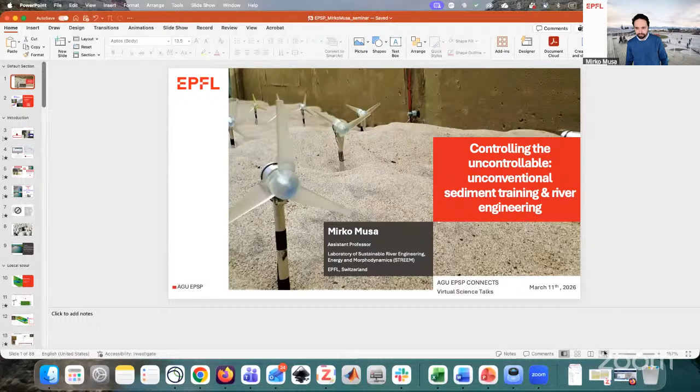Yeah, we do, perfect. Well first of all, hi everyone, good morning, good afternoon, good evening, depending on where you are. And first of all, thank you so much to EPSP members and the organizers for inviting me to give this talk, I'm really happy to be here. As I said, my name is Mirko Musa. I'm a fairly new assistant professor at EPFL, I started about a year ago.

Here I lead the Stream Lab. As you can see, it's misspelled on purpose, because it stands for Sustainable River Engineering, Energy, and Morphodynamics. I acknowledge it's a mouthful title, but it really encapsulates well what we do in my group. We work with renewable energy from water, specifically hydropower and hydrokinetic energy, but we try to do it in a way that works synergistically with river engineering, river morphodynamics, and river management. This is essentially the leitmotif of my talk today.

The theme of today's talk is to show you some unconventional ways to do sediment transport, sediment training, and to manage sediment training. Why?

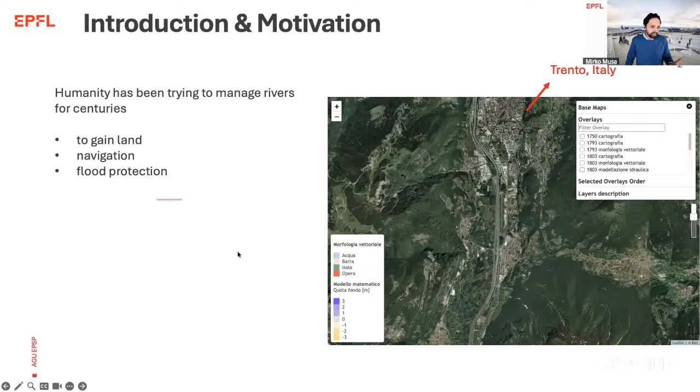Well, humanity has been trying to manage rivers for centuries, as you all know. We mostly did it for human development, for our own gain, to gain land, to allow for navigation, but also to protect ourselves from flooding and so on. And how did we do that? Well, we simply tried to fix rivers in place. We stabilize riverbanks, straighten the course of rivers, resulting basically in the suppression of their natural dynamism.

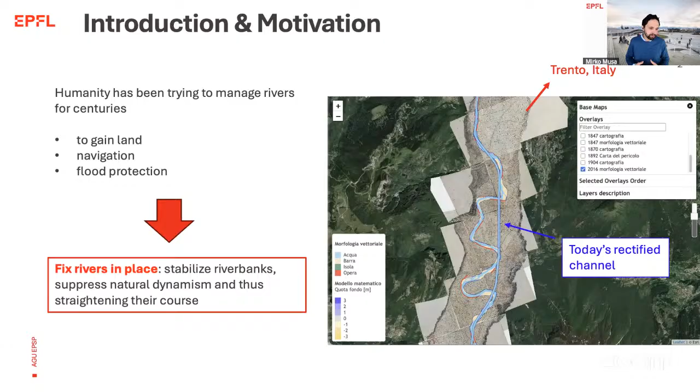We also now know that, unfortunately, by doing that we were actually harming the river system. There was this fantastic paper by Professor Jim Best in 2019 in Nature Geoscience, where he reviewed several of the anthropogenic stresses that are currently changing and, in some cases, degrading rivers faster than nature can adapt to.

And of course, in addition to human management, now we also have climate change that is obviously complicating things, exacerbating the problem. It's also reminding us that our assumption of stationarity in our hydrological statistics from the past is no longer valid. But it's also reminding us that we need to come up with management strategies that are not only sustainable, but also flexible and adaptable.

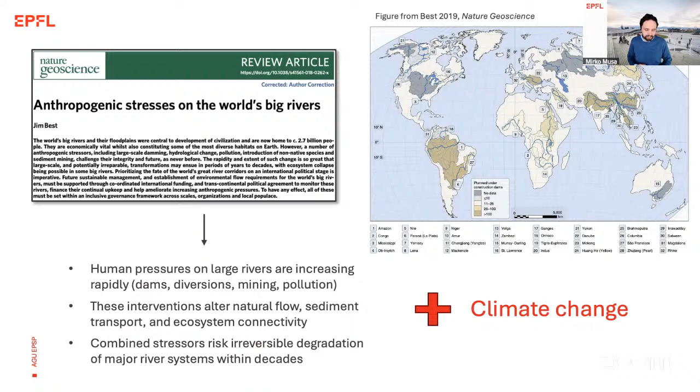So one way we started addressing these problems is, of course, stream restoration. We've been increasingly adopting measures to renaturalize rivers, sometimes with mixed success, obviously. Sometimes we tried, for example, to impose an engineered, quote unquote, natural-looking shape of the river, like a meandering shape.

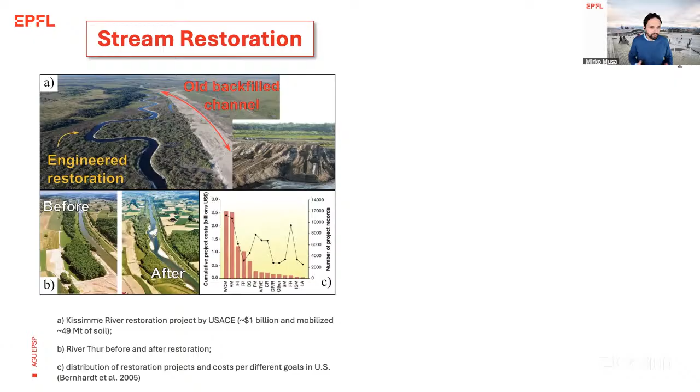Moving tons of soil with very costly interventions, and again with mixed success, or simply sometimes we just started to remove the lateral constraints of the river and let the river rewander again. Of course, this is a great solution, but it's not always applicable, because at the same time we still have a lot of population centers, development, and infrastructure within and along the shores of big rivers.

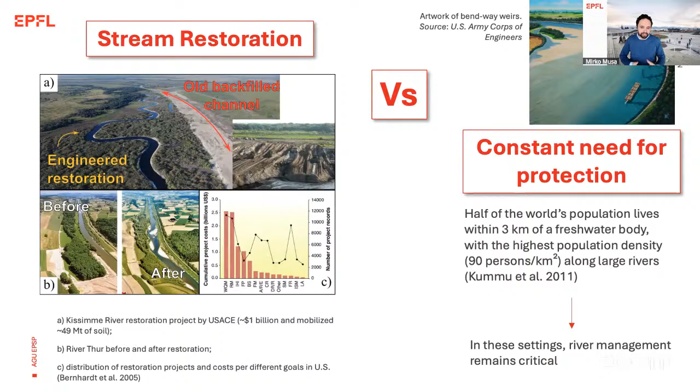So in these settings, river management still remains a critical necessity. And to me, there is a need to do both restoration and protection at the same time. We need to try to address them both in a sustainable way.

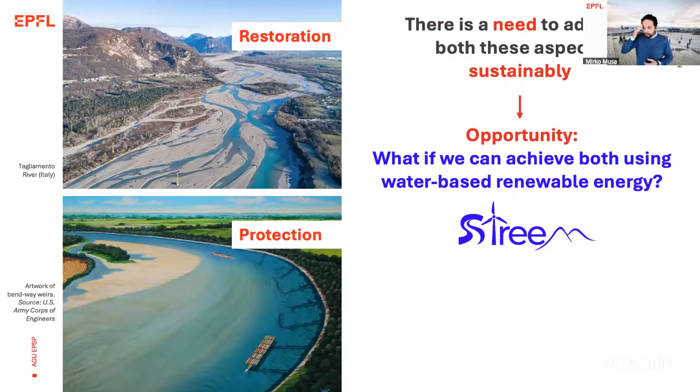Reflecting on my past research, I wondered, what if we can achieve both of these aspects using renewable energy technology? I know it sounds crazy, but the reason I'm saying this is because in my past research—I did my PhD at the University of Minnesota at St. Anthony Falls Lab, known as SAFL, and then I got a position at Oak Ridge National Lab.

In my previous work, I observed that if we place hydrokinetic turbines in rivers, they actively interact with sediment dynamics, both locally and non-locally. So today I'll meander, pun intended, through past and more recent research to show you these unconventional ways to interact with and manage sediments, and perhaps convince you that we may be able to synergistically integrate river-based renewable technology and sediment management strategies.

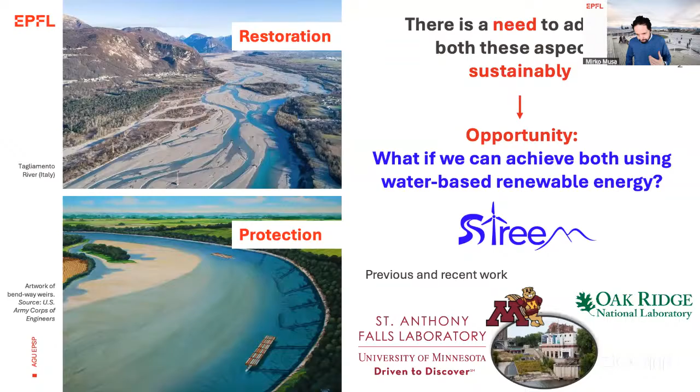Now, I put this image here for the early career students out there. This is how I felt during my PhD, since I was doing this mixed research—how I felt sometimes when talking about turbines to a morphological audience, and at the same time talking about meandering and morphodynamics to turbine people. So it's always been a struggle to fit in both shoes.

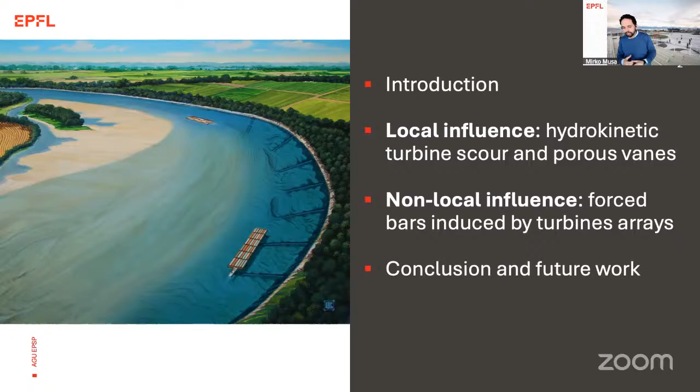But anyway, today I'll show you some examples of first how turbines and also porous vanes can steer sediments, and then how multiple turbines can actually influence the morphodynamics non-locally, at larger scales. But let's start with the local influence.

This whole thing started because at the very beginning of my PhD, my project focused on looking at the interaction and impacts of hydrokinetic turbines on the physical environment of rivers. Hydrokinetic turbines are essentially the same as wind turbines, but in water. The geometry is exactly the same, the working mechanism is the same: flow, in this case water, flows through a rotor that spins and creates energy.

The power you can extract is proportional to the size of your device, but most importantly to the velocity of the flow, because it's to the cube. So the first thing we did was look at the scour that an operating turbine could induce on the seafloor or river floor, the erodible bathymetry.

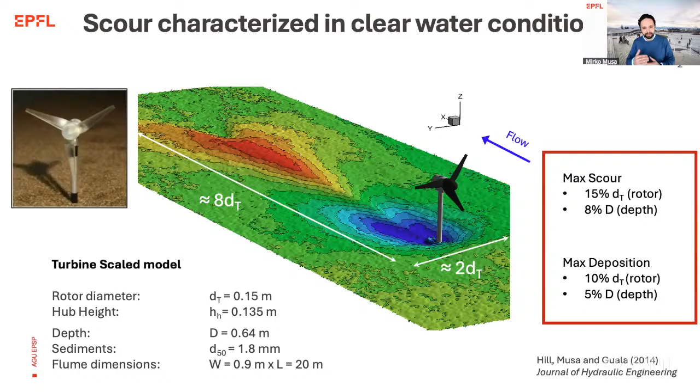This is, for example, a movie of the evolution of a scour downstream of a large-scale turbine model. We characterized both the spatial extent and magnitude of the local scour and deposition induced by an operating turbine using a small model on an erodible bathymetry, in clear water without sediment transport, but at the threshold of motion. Then we extended that study to a live bed, with sediment transport and moving bed forms through the channel.

This time we were monitoring the evolution of the bed by scanning the topography with sonar back and forth across the channel at the turbine location. You can see the resulting movie of the dunes traveling through the turbines.

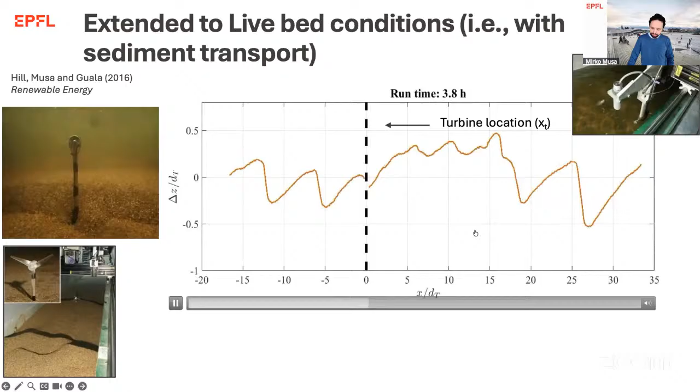But also, as opposed to a static bridge pier scour, a hydrokinetic turbine can actually yaw. Yaw angle is the misalignment between the axis of a turbine and the direction of the flow. We wanted to test this because we had a hypothesis, a feeling that by yawing the direction of the rotor, you would have an impact on the direction of the scour and deposition pattern, and potentially you could affect the mobility of sediments locally.

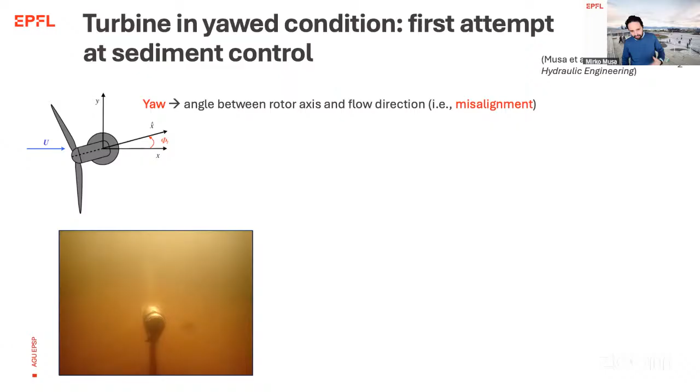So we designed a bunch of experiments to test the effect of yaw angles. Since we thought the turbine could impact the directionality of sediment, we also wanted to evaluate whether we could use this strategy at the sidewall, placing the turbine close to the side bank of the channel as a form of erosion mitigation technique, because the turbine is extracting energy from the flow, slowing down the velocity, potentially slowing down side bank erosion, while at the same time redirecting sediment toward the bank itself.

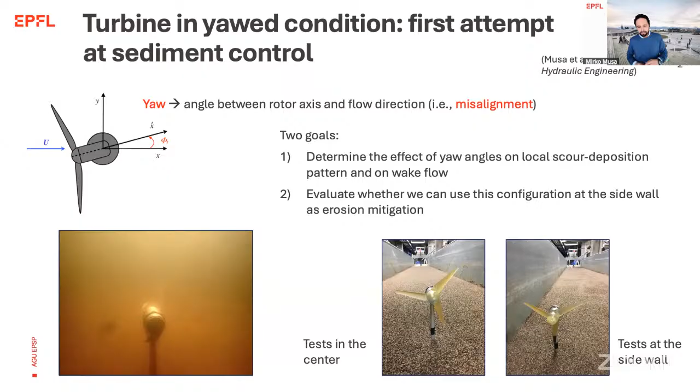So we ran several tests, first with the turbine in the middle of the channel at different yaw angles, again on the same erodible bathymetry, and again in clear water conditions, so with no sediment transport, but at the threshold of motion.

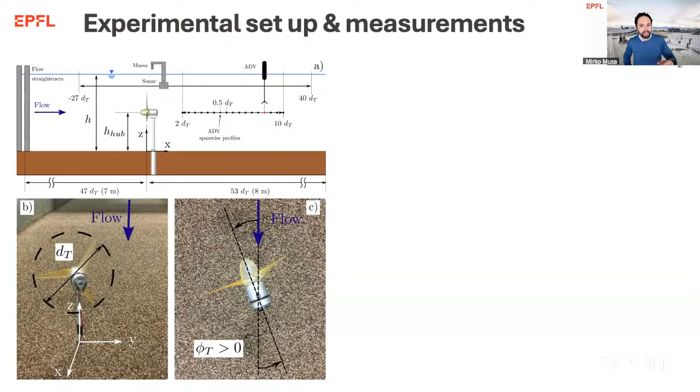We first characterized the baseline, basically redoing the same experiment as before with a turbine unyawed in the middle, characterized the local scour and deposition, and then tracked the time evolution of the scour, checking until it reached equilibrium, which happened about 2 hours into the experiment. At that point, when the final topography was in equilibrium, we started measuring the flow behind the turbine.

We used an acoustic Doppler velocimeter, moving it across the channel in the span-wise direction at different X locations downstream, in order to characterize the wake of the turbine. The wake is essentially the region behind the turbine where the flow slows down because the turbine is extracting energy from the flow, and so you have a region called the wake deficit.

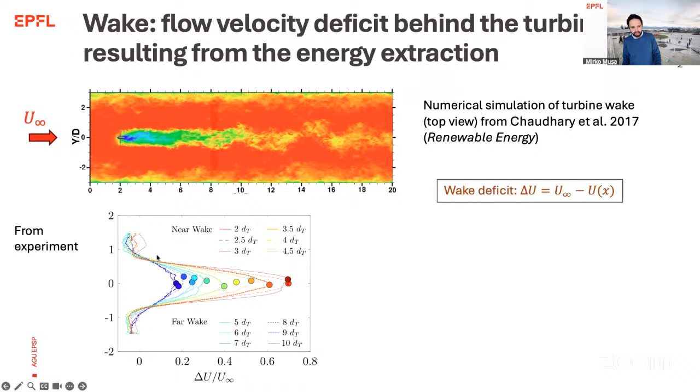The wake deficit is the difference between the incoming undisturbed flow upstream of the turbine and the flow measured behind it. As you can see from our measurements, these lines are span-wise profiles of the wake deficit. The closer you are to the turbine, shown by the warm colors, the bigger this wake deficit is. I acknowledge the choice of colors is pretty poor because it's essentially the opposite of the numerical simulation—the warm colors here represent maximum wake deficit, lower velocities, which correspond to the blue colors in the numerical simulation.

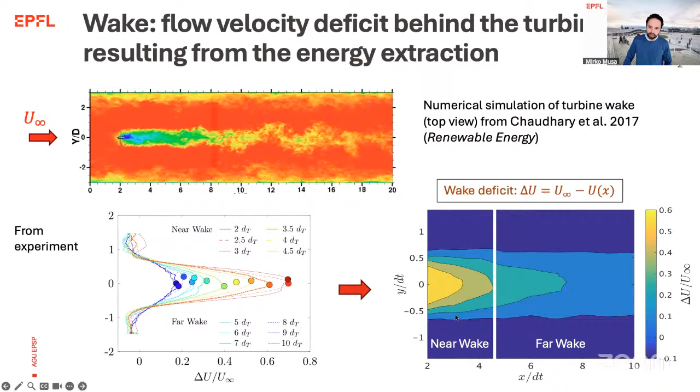As you move further downstream from the turbine, the wake deficit starts decreasing because now high momentum fluid from the side starts entraining the wake, recovering toward the undisturbed condition. If we stitch together all these profiles taken downstream of the turbine, we obtain a nice contour plot of the wake, which becomes important later.

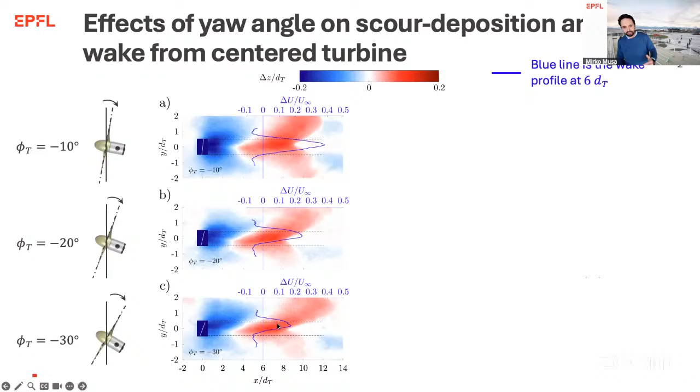To visualize the effects of yaw angle on both the local scour and deposition pattern and the flow behind the wake, we plotted the profile at 6 rotor diameters downstream of the turbine, superimposed on the final bathymetry, and then started yawing the turbine more and more. The more negative the yaw—in other words, the more the rotor tilts upward in the plot—the more both the wake and the pattern of maximum scouring and deposition start moving in that same direction, being steered toward where the yaw is happening.

The same thing is true but in opposite if we look at the other yaw, positive yaw angles. You see that the rotor is tilting down, and so also the wake and the resulting pattern starts tilting and getting steered in the same direction.

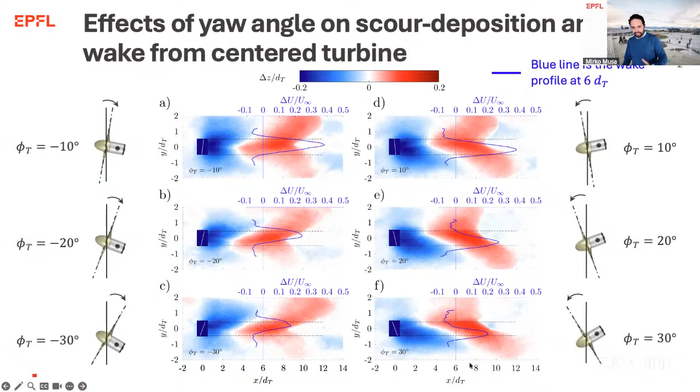So the next step was to look at whether these findings could hold when the turbine is close to the sidewall, because we wanted to see whether the turbine could act as a stream bank protection, and could either mitigate or in opposite enhance the side bank erosion.

The idea was to potentially use the turbine as a protector of the bank, because by extracting energy from the flow, you would shield the bank with the wake, but at the same time steer the wake away from the bank. You didn't want the wake to impinge on the side bank, because the wake itself is turbulent.

And at the same time, try to move the sediment deposition towards the bank to act as a bank toe protector or a bank toe reinforcement.

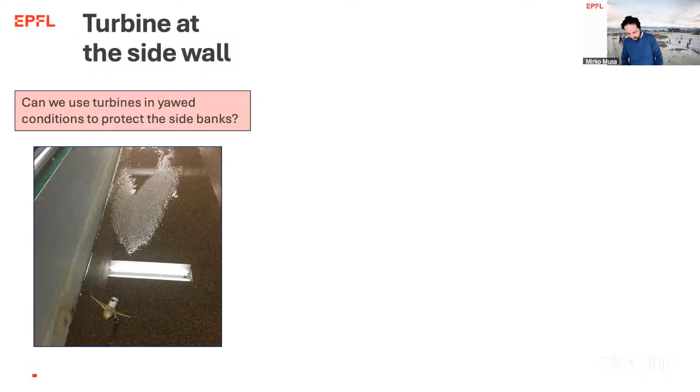To do that, we tested 3 cases: the turbine at the wall with the un-yaw condition, the negative 20 yaw, and positive 20 yaw. You start seeing from both, if you look at the wake and how the scour deposition pattern behave and react, that maybe the positive 20-degree was actually doing what we're trying to do.

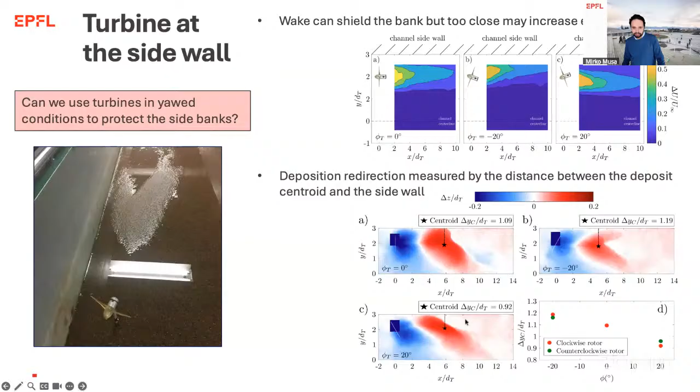You see that the wake is steered toward the center of the channel, as opposed to the negative 20 where it's actually pushing against the channel. At the same time it's moving the centroid of the positive volume towards the wall—the centroid is getting closer, as opposed to the negative 20.

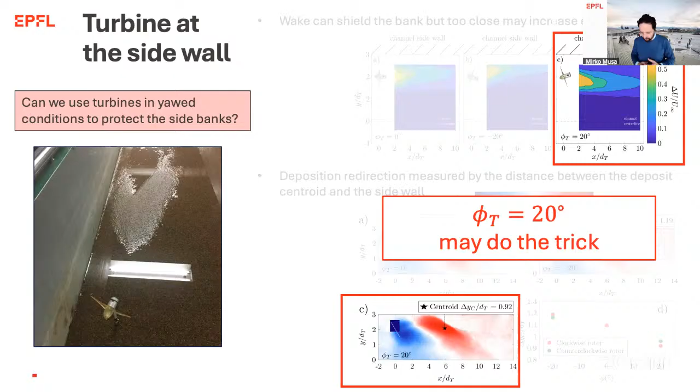So we thought that maybe the 20-degree yaw was actually doing exactly what we're trying to do and might do the trick. Based on this result is where I got my first idea of what I'm working on now, because we saw this positive feedback—by yawing the turbine we could potentially reach that goal of protecting the bank.

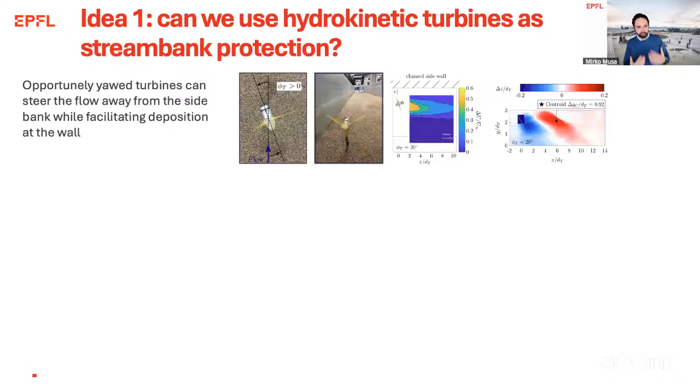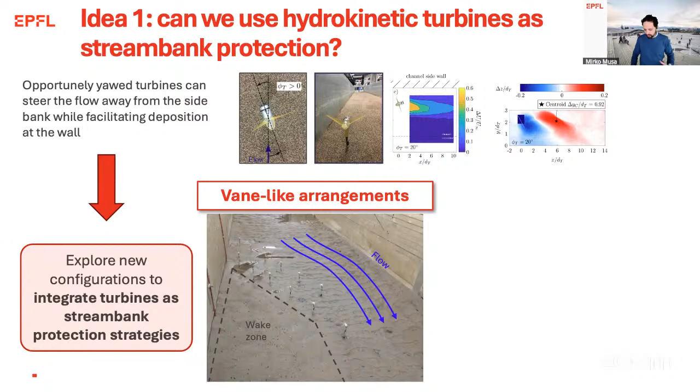So what if we try to use more turbines as a stream bank protection strategy? For example, rearranging them to look like a vane, pushing the main flow away from the bank and protecting the bank using their collective wake. Or in an extreme case, potentially putting turbines on the outside of a river meander.

On the outside of a meander, that's where the flow is accelerated, so potentially that's where the hydrokinetic potential would be maximum. But it's also where erosion is maximized, because of the fast flow and the secondary circulation that erodes sediments—actually what causes the meander to move. So what if we put turbines in there and start extracting energy, and maybe counteract this erosion process?

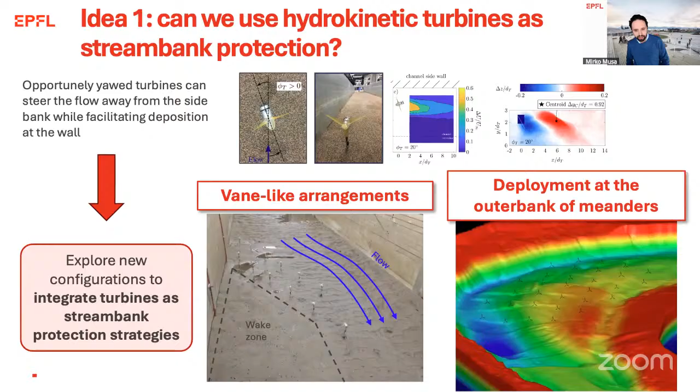So this is one of the things I'm thinking about and working on. But of course there are other more classic ways to train sediment, to affect sediment motion. One of which is the submerged vane. This is not a new technology or design—it was introduced in the 80s by Professor Jacob Odgaard in Iowa. These vanes are also known as the Iowa vanes.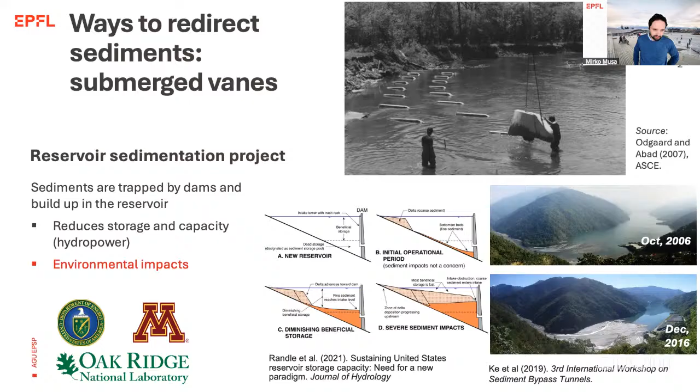But we recently tested a similar concept, because we were trying to move sediments as part of a larger project on reservoir sedimentation. This was when I was at Oak Ridge, a collaboration between Oak Ridge, the University of Minnesota, and the Department of Energy, trying to find solutions and mitigations for the issue of reservoir sedimentation.

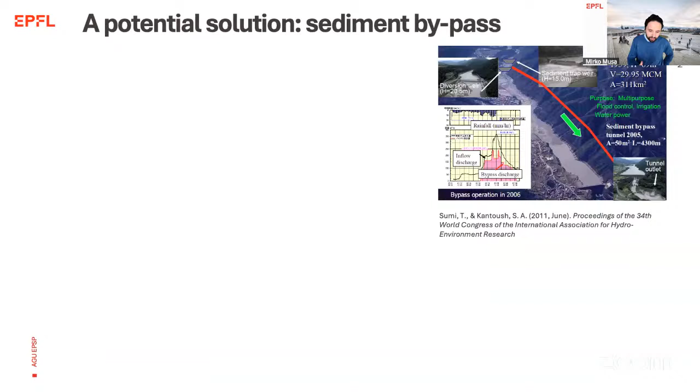Specifically, one solution is bypassing sediment around the dam, from upstream to downstream. Typically it's done with channels in the few examples in the world, or as the University of Minnesota was proposing, using hydrosuction—a technique where you suck the sediment from upstream the dam and then siphon it around the dam. As part of this project, to maximize the extraction, we wanted to redirect as much sediment as possible towards this suction point.

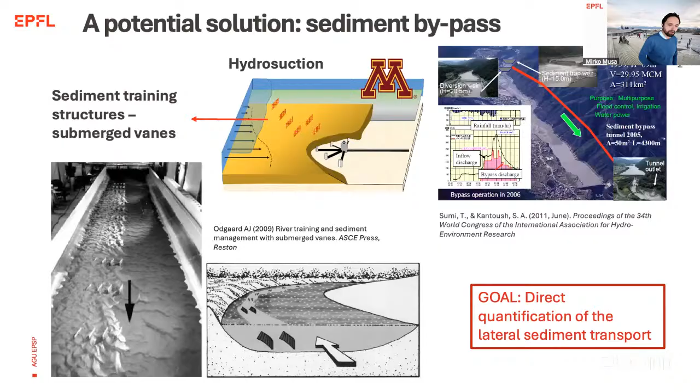And so we start testing submerged vanes for that reason. But as we were designing the experiments, we realized that we really didn't have a good way to measure this lateral movement of the sediment, so we didn't have a good way to quantify the efficacy of these vanes. Through our experiment, we came up with a new methodology to try to estimate the lateral sediment flux, starting from high-resolution scans of bed forms.

So you see here, we basically tested an array of porous vanes in the main channel at SAFL, at St. Anthony Falls, in live bed conditions, with bed forms traveling along the channel. Here we were scanning 3 regions in the channel using this submerged laser scanning device that was developed at SAFL.

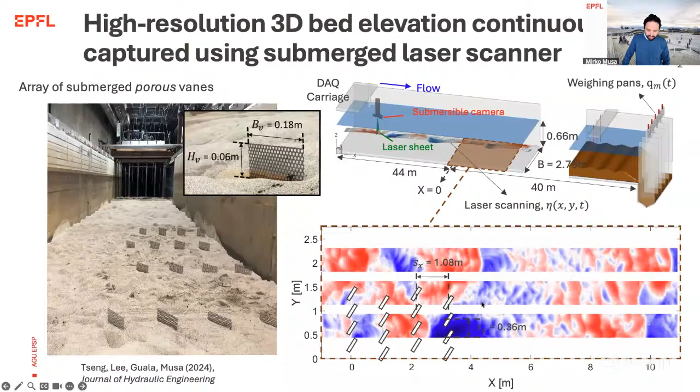And with that, we were able to identify each individual bed form on a streamwise transect at consecutive times. Using an algorithm developed by Jiong Lee, one of our collaborators, we extracted the geometric characteristics of each individual bed form and their migration velocity.

And then using the Simons et al. equation from 1965, we could estimate the streamwise sediment transport flux, calculated basically by relating the geometry of single bed forms to their velocity. So in this way, we had sort of a Lagrangian view, if you will, of sediment transport, each dune contributing a little bit to sediment flux.

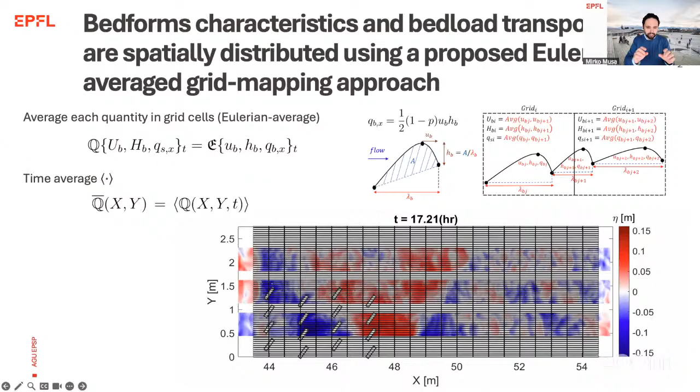But then we switched this Lagrangian view to a more Eulerian observation approach, by conditionally averaging all the bed form geometric characteristics, and the associated bed load transport, on a regular grid for the entire domain. By averaging all these quantities in time, we could obtain an average bed load transport rate that was spatially distributed over a 2D XY plane.

And this is what it would look like. These are values of streamwise bed load transport in the 3 scanned regions. Of course, for a baseline case, it's fairly homogeneous, as it should be. Whereas for the vane array experiment, you see a big reduction of sediment transport capacity within the array. It's easy to understand why, because the vanes are slowing down the flow, slowing down the bed form movement, reducing the capacity to transport sediments.

This is more evident if you take, for example, a transect within the array at x equal 3 meters, which is this panel here, the second panel in the lower plots. You can see that this is the span-wise profile of the bed load flux.

Where the red line is from the vane array, you see that there's definitely a reduction in sediment transport within the array, in the Y values within the array, as compared to the baseline case, which is the black dashed line.

But you can find an increase in sediment transport on the unobstructed side, next to the array. That's because by continuity, the flow there is instead accelerating, so the bed forms probably are going faster, giving a much larger sediment transport capacity.

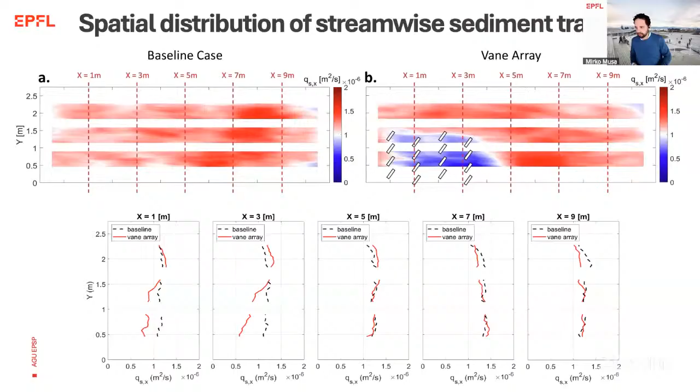But then downstream of the array, you see that the sediment transport capacity goes back to being homogeneous like the baseline, meaning this effect is only localized in the vicinity of the array. This imbalance in sediment flux that we notice close to the array is exactly what we think will explain the existence of a lateral flux on average.

And this is even more justified if you look at the instantaneous movement of sediments. If you stare at this video long enough, you'll start seeing that behind each vane, at some point, there's the formation of a chevron shape tilted towards the left-hand side of the channel, or in this plot, towards the upper side.

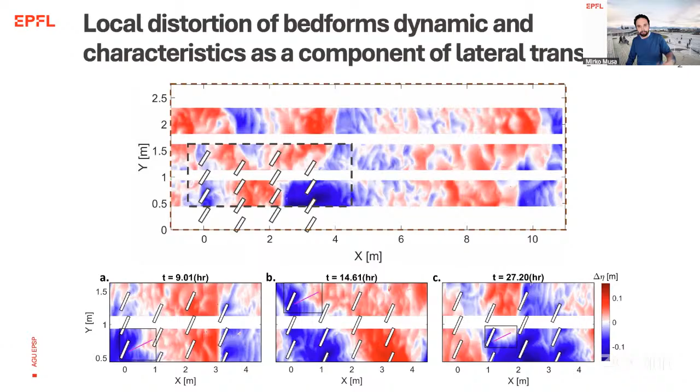You see some snapshots here in the bottom. If you look, you'll notice that the bedforms are physically distorted and steered towards the upper hand side. This is one of the components of this lateral transport that I'm talking about.

Thanks to this Eulerian average mapping, we were now able to estimate this lateral bed load transport by simply applying mass conservation, because we're observing this imbalance in the streamwise flux.

So this QSY is the lateral flux through the interface between the two control volumes. If you take the difference between the two mass conservation equations in the two control volumes, you can get QSY, small qs, which is the lateral flux per unit length. Then, if you multiply this lateral flux by the length of this interface, L, you get the total amount of sediments moved laterally—an estimation of the total sediment flux in the lateral direction.

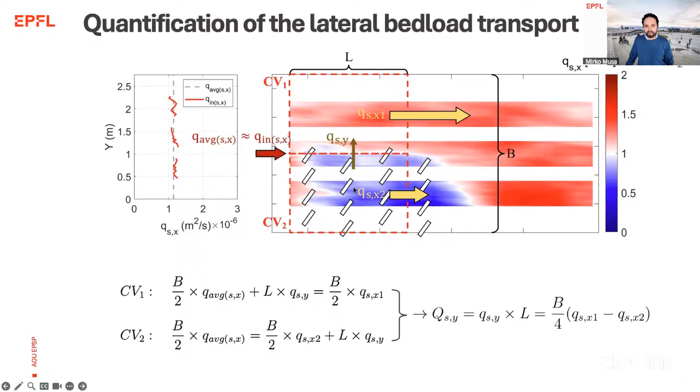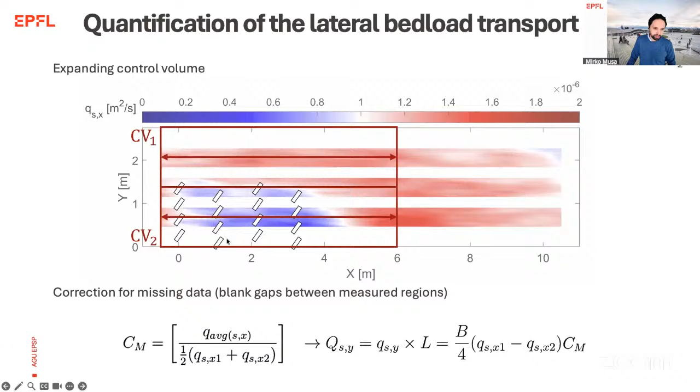By expanding this control volume—literally moving the downstream boundary and extending the length of this interface—we could show the longitudinal evolution of the lateral flux as you move downstream. Because we have gaps between the measured regions, we had to introduce a corrective coefficient in order to ensure global mass balance.

But essentially, these are our results. You see the black and gray bars are this lateral flux that we quantified. The black bars are from the vane array, whereas the gray bars are from the baseline. For the baseline, there's almost no lateral flux, as it should be, whereas for the vane array, you have a pretty significant lateral flux, at least compared to the baseline.

Again, this top plot is the little qs, the QSY, which is the lateral flux per unit length. But then if you multiply that by the length of the interface between the two control volumes, you can estimate the total mass that you're moving.

You see that this total mass peaks around 2.5 meters, around the third row of the array, meaning that if we were to place a hydrosuction point, here would be the best place to collect most of the sediment—which was ultimately the goal of our project. We believe this was the first attempt to quantify lateral sediment transport in this way.

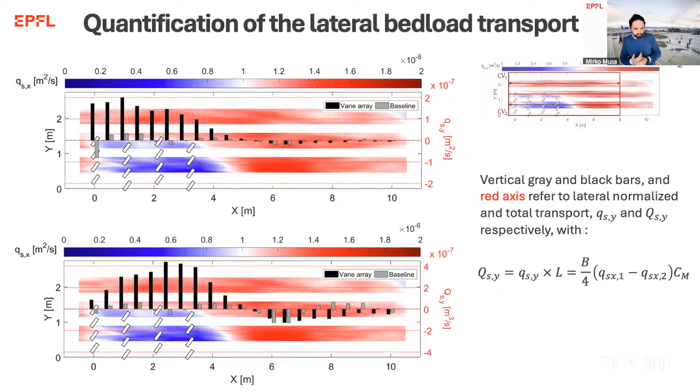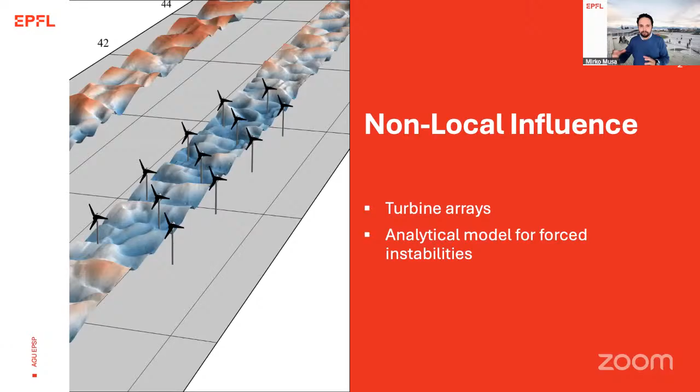So now switching gears—so far I showed you that we use turbines and porous vanes to steer sediments towards a preferred direction and influence the local morphology. But now I want to show you how actually a pack, an array of turbines, would affect the morphodynamics non-locally, so further away from the region of influence.

If you remember, earlier I showed you that one single turbine in live bed would create a local scour, but I said that probably there wasn't much of an effect non-locally. However, that case was a very simplified, very specific case with one single turbine centrally installed in the cross section.

But in real life, we might actually want to install turbines on one side of a river, of a channel, either to use it as stream bank protection, or more pragmatically, to allow for navigability on the other side, or to lower installation and maintenance costs, and so on.

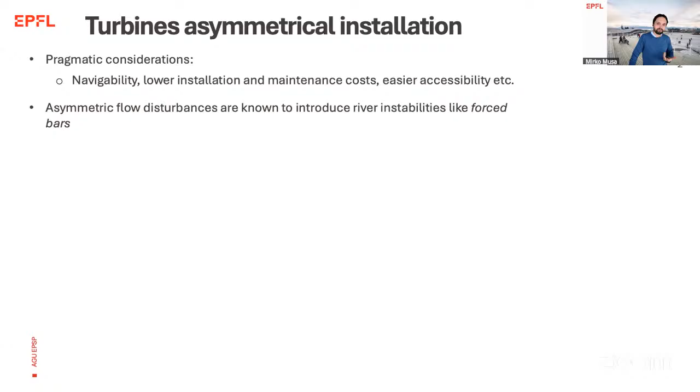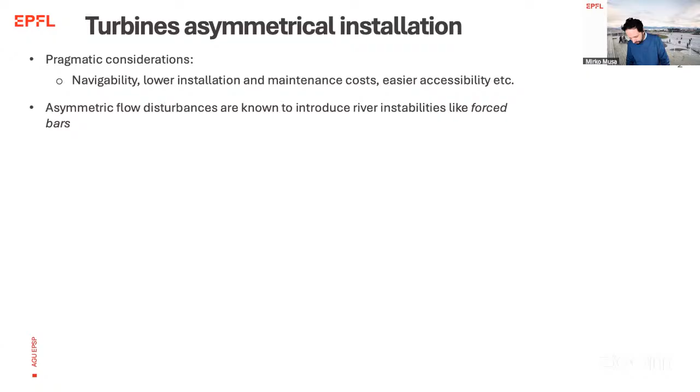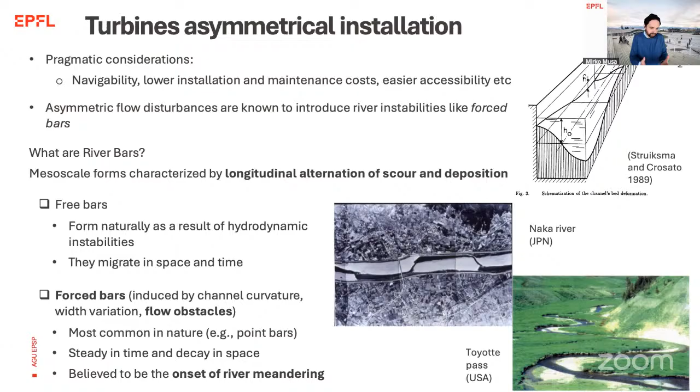They can be forced by external stressors, like in this case the turbines. To me, this is the more interesting one because, first of all, they are the most common and most observed in nature, and they are steady in time and decay in space. Because they are steady, they are believed to be the trigger of river meandering, since they impose a specific motion of the flow. So in the perspective of evaluating the impacts of turbines in rivers, this was a big deal, something we needed to look into.

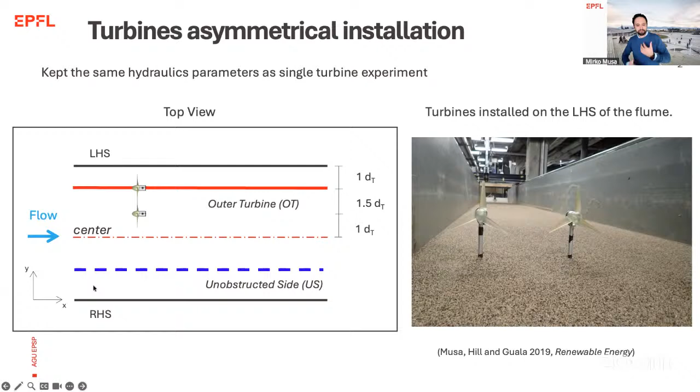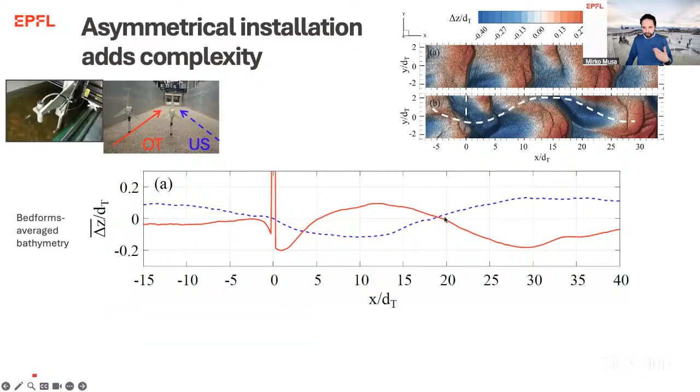We ran the experiments for a long time and averaged all the sonar signal in time to evaluate the average bathymetry. The mean bed from the two sidelines presents an intriguing and complex profile, characterized by a steady alternating scour and deposition pattern that totally resembles the longitudinal profile of a forced bar, with an amplitude up to 18% of the water depth, which is pretty significant.

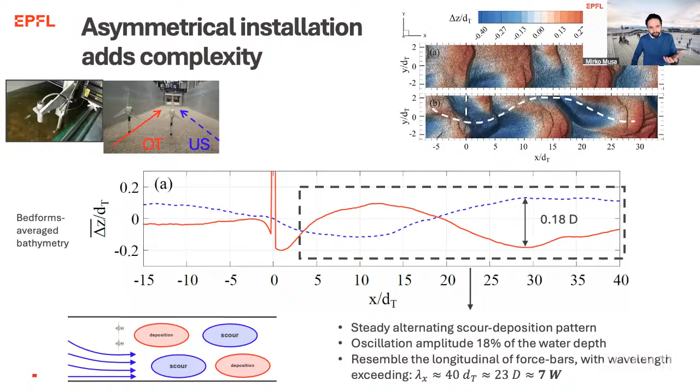Because we observed this phenomenon with two turbines, and because in real life, in order to produce enough energy, you have to place multiple turbines, an array of turbines, we wanted to test and try to observe the same phenomenon using a model of a turbine array, and perhaps try to minimize it.

So we installed 12 of these little turbine models on one side of the main channel, this time only obstructing a fifth of the channel width. We were monitoring the evolution of the two-dimensional bathymetry using the same laser scanning device I showed you earlier, in two characteristic regions: one across the turbines and one across the unobstructed side, over time.

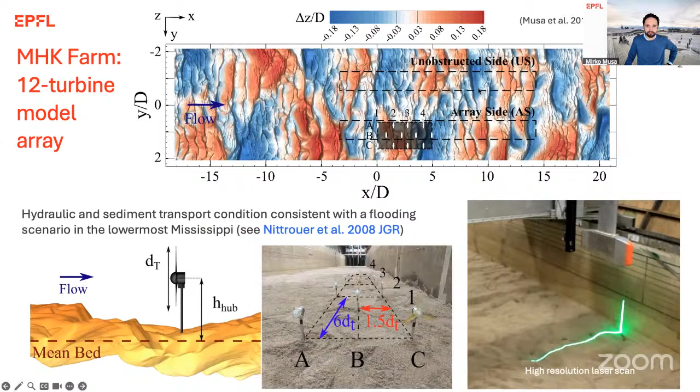This is the result of the scan. You see the bed forms traveling through the array and through the unobstructed side. The gray area is the whole channel. Of course, it's very sped up, this is not the real velocity of the bed forms. We ran this experiment for about 12 hours, collected the data, and then averaged again to evaluate the overall effect.

From the 2D average bathymetry, you see there are a multitude of scales of effects. There are small effects, represented by the classic signature behind each turbine. But then there are patches of scour and deposition that are almost as big as the array itself, so an effect at a much larger scale.

To evaluate that, we filtered this average bathymetry with a low-pass Fourier filter, which revealed this large scale oscillation and this longitudinal profile. If you take two lines from the two regions, you see this profile totally resembles the same profile we observed with the two turbines, again similar to the profile of a forced bar, but this time with an oscillation amplitude of only 7% of the water depth.

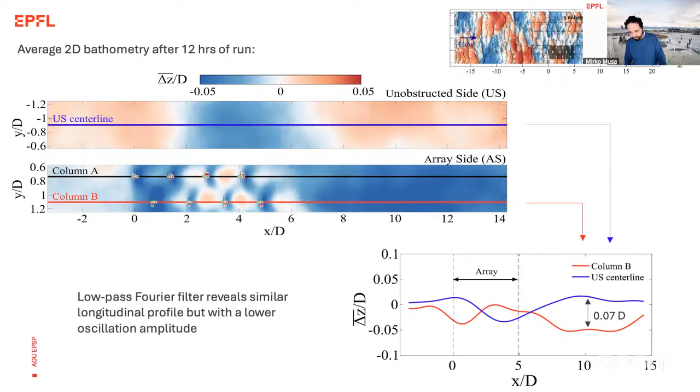Because we observed this, we wanted to investigate this aspect more in depth. But experimentally it's very complicated because of the variety of parameters. So we turned to Professor Marco Redolfi, an expert in morphodynamic theories and specifically analytical modeling, and we tried to tackle this problem from a modeling perspective, specifically to answer two questions: first, is what we're observing in the bathymetry actually, on average, a bar-type phenomenon? And if so, how do the characteristics of the external forcing affect the resulting morphodynamics?

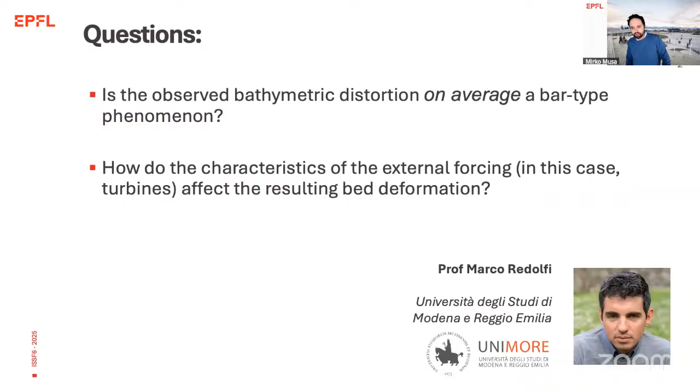So we developed a fairly simple model based on the classic formulation of morphodynamic instabilities, but this time introducing the forcing as a drag force in the equation.

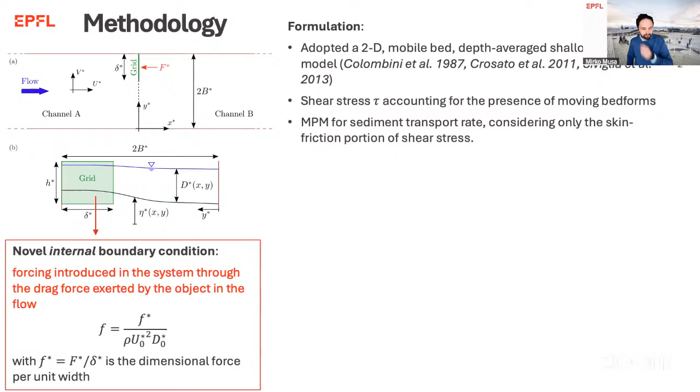And then we implemented that into the conventional linear perturbation approach, assuming that this drag force was small as compared to the flow momentum, so that we could neglect non-linear, higher order non-linear term and linearize the equation in the drag force.

And then we essentially split the domain into two channels, an upstream channel and a downstream channel, where we found the solution as superimposition of 2D Fourier modes, which is the standard way, exactly as has been done in the past, for example, from Zolezzi and Seminara 2001.

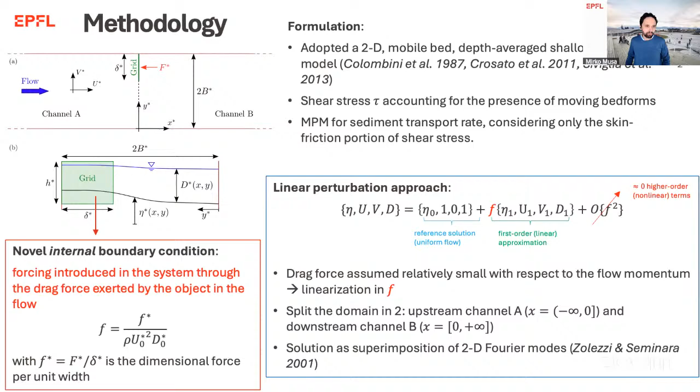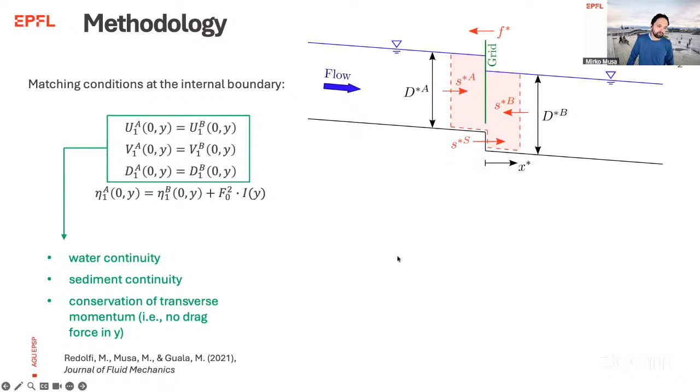Then we matched the solution at the interface of the two channels where the forcing was. This is, if you will, the novelty of our methodology, because while three of the internal boundary conditions are pretty standard: water continuity, sediment continuity, and the conservation of transverse momentum, so no drag force in Y.

The fourth one was the new part. Because now we have a discontinuity in the flow, we have to assume that in erodible bathymetries, there will be a formation of a bottom step, of a bottom elevation difference.

And we showed that by applying momentum balance, we demonstrated that the elevation of this bottom step would be proportional to the intensity of the forcing itself. So this is really the extension of the morphodynamic influence framework to the introduction of the forcing as a function of its own geometrical characteristic and drag properties.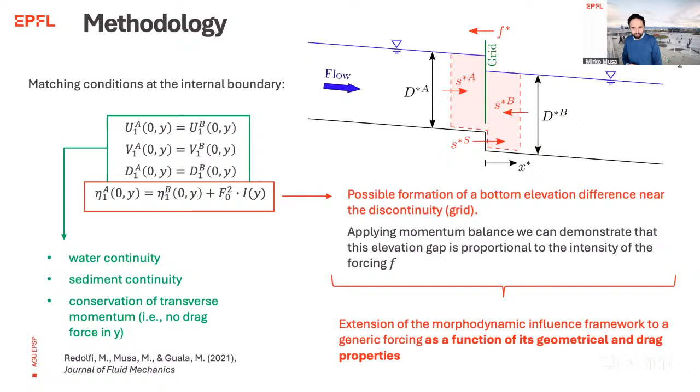And so we developed new experiments in order to validate this model, using this time again a porous grid as the perturbation, because the grid would introduce a very similar hydrodynamic effect in the flow as the turbines, but without the limitation of the depth, so that we could explore more water depth, and so more width to depth ratio parameters, the beta parameters, which is very important in morphodynamics.

And so we ran a series of tests. Today I'll show only two of those as a validation. These two experiments were essentially very similar conditions, same grid, very similar transport capacity, but with two different beta, and most importantly, two different proximity of beta to the beta resonant, with the GD2 being closer to the resonant value of the width-to-depth ratio.

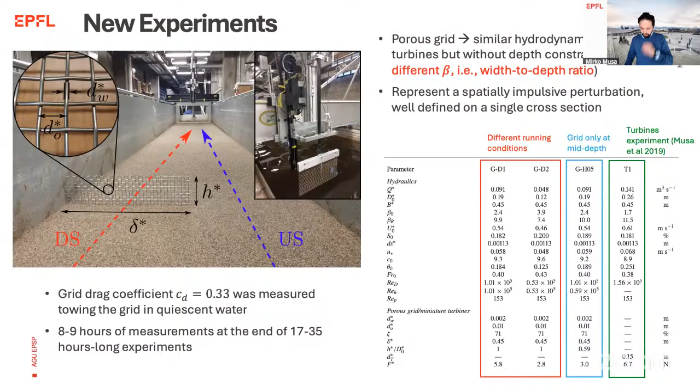And so by comparing the model, which is the thick line, to our experiments, which is the dashed lines, you see that the model is performing pretty well.

Again, these two experiments are essentially the same, except for the second having a beta number, a width to depth ratio closer to the resonant value. And that's actually why the model performed better for the second case.

But overall, we're pretty happy with the model. You see that the amplitude of the morphodynamic response and the wavelength are pretty well captured in both cases. The only thing that is underestimated is the inverse distortion downstream of the switch point for GD1, probably because of the low value of beta.

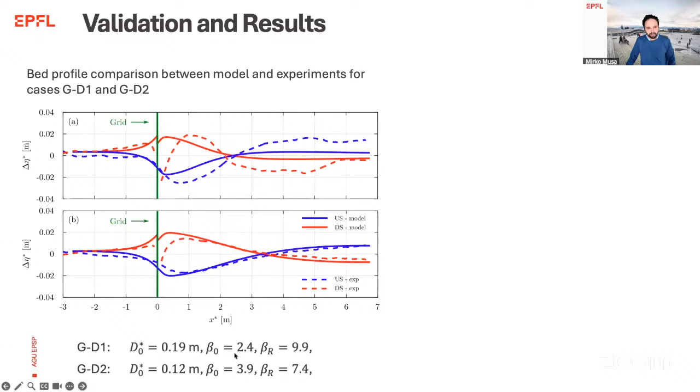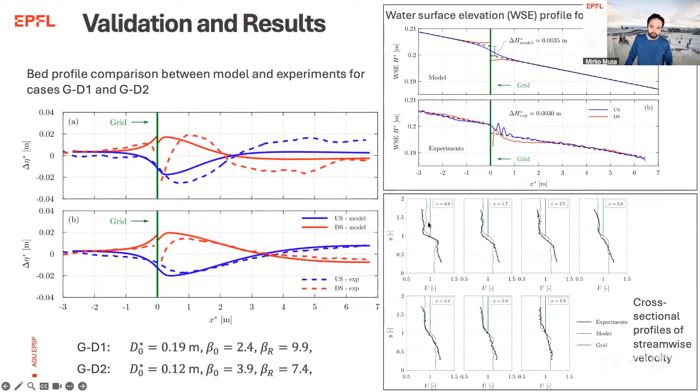And so this is starting to show the limitation of a 2D model. But then we further validated also comparing the water surface elevation and the cross-sectional profile of the streamwise velocity. And in both cases, the model prediction matched pretty well the measurements from the experiments.

And so we were pretty happy. Once the model was validated, we decided to run a series of sensitivity analyses in order to evaluate how different parameters would affect the morphodynamic response. But today I'll just briefly show the one associated to the forcing itself, because at the end of the day, that's what started this whole analytical modeling in the first place.

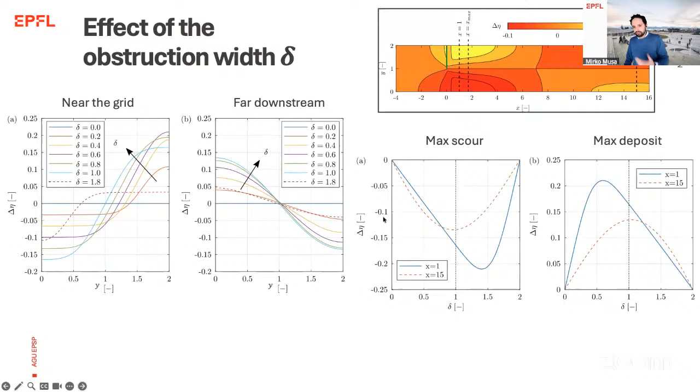But this rich spectral composition is only local, because the Fourier modes greater than the fundamental mode spatially decay. So as we move downstream away from the grid, at x equal 15, the result becomes symmetric and sinusoidal again, because at that point only the first mode has survived.

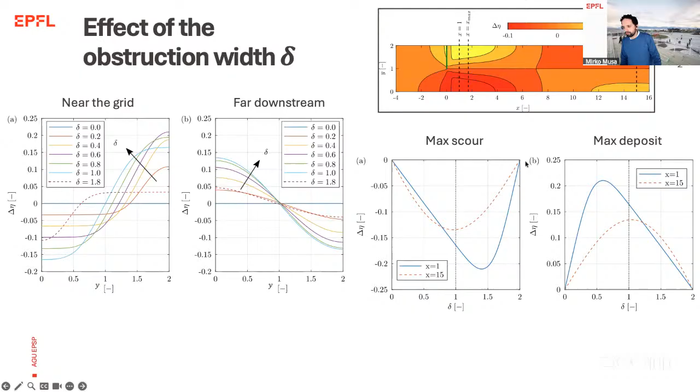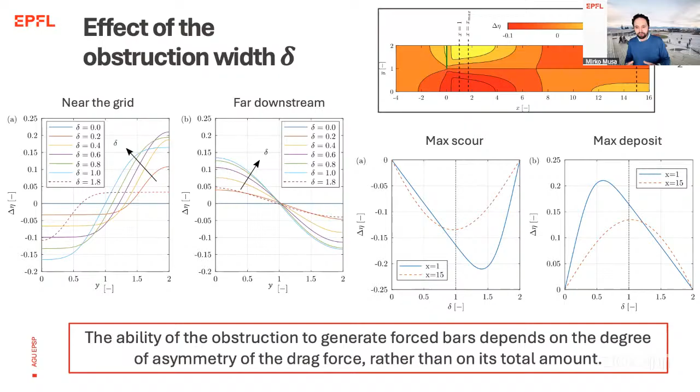But if the grid were to extend to the whole channel, then the effect would basically nullify, would vanish. So taken all together, these results show that the ability of the obstruction to generate forced bars depends not on the total amount, but rather on the degree of asymmetry of the drag force.

This also suggests that, contrary to what we thought, the nature of the forcing might have a dramatic effect on the morphodynamic response.

So that gave me a new idea, the other idea I'm trying to work on now: perhaps if I'm able to manipulate even dynamically the properties of the drag of this forcing, maybe I can create some more interesting morphodynamic response, a desired morphodynamic response.

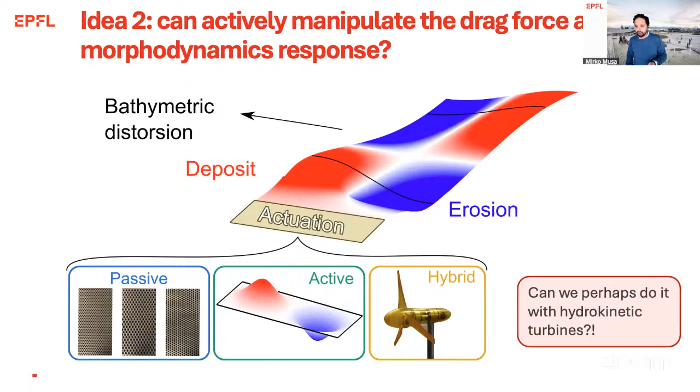And again, perhaps we can do it using hydrokinetic turbines. So that is essentially where my ongoing work is going, that's the direction we're taking.

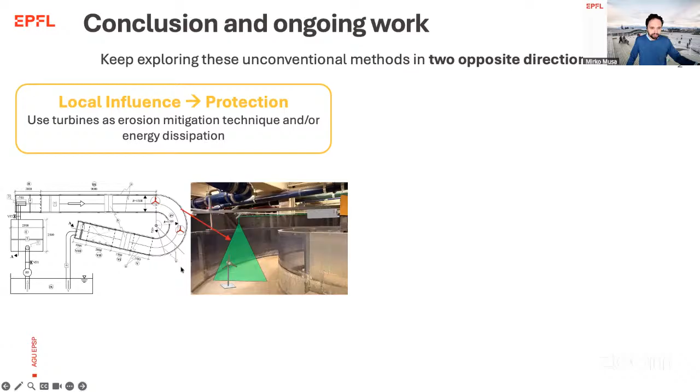So keep exploring this unconventional method, but in two opposite directions. On one hand, exploring the local influence as a form of protection, placing turbines in a meandering channel to try to protect the bank by extracting while producing energy.

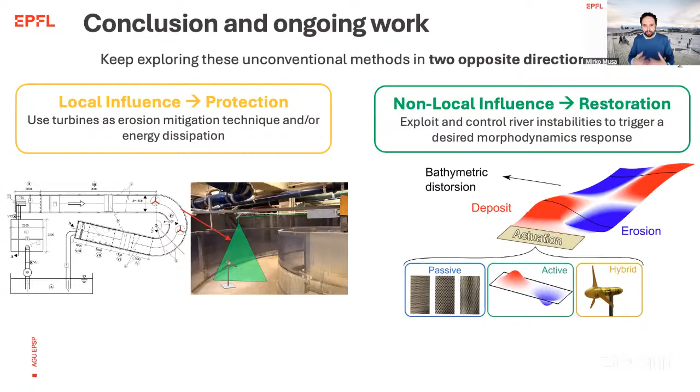On the other hand, exploiting this non-local influence as a form of restoration, trying to control river instabilities to trigger a desired morphodynamic response. All this follows the same philosophy: trying to integrate river engineering and renewable energy production towards a shared benefit that could increase the sustainability of both aspects.

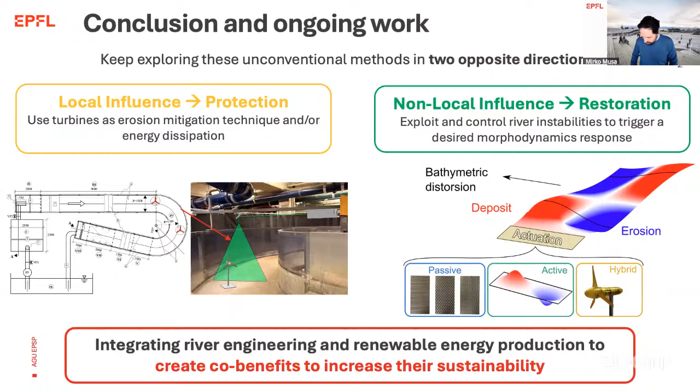So with that, I conclude my talk and I'm open to any questions.